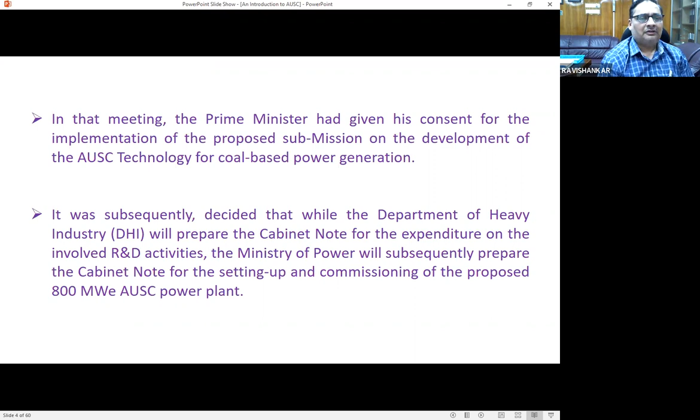So the AUSC initiatives, based on discussion at the highest level of Government of India, sir, led to the consortium of IGCAR, BHEL, and NTPC being formed by the PSA's office in August 2010 for development of advanced ultra supercritical boiler technology for power generation through indigenous effort. The key point, as we will see in subsequent slides, is that the total effort was indigenously done. Although materials were not available, the total technology development, every effort, was taken indigenously by these three groups to realize the Make in India concept, way back in 2010 itself, sir.

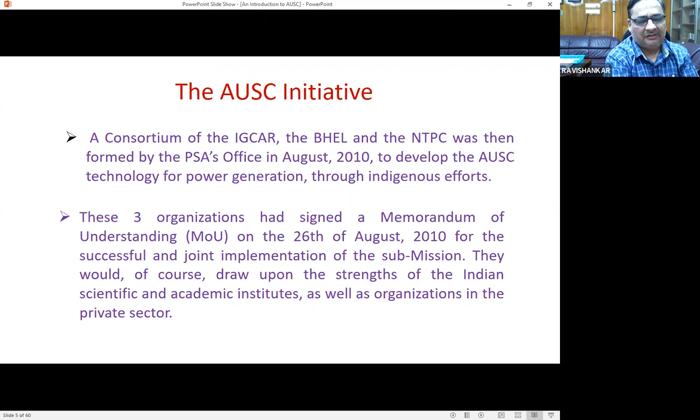Accordingly, an MOU was signed on 26th August 2010 for successful and joint implementation of the mission, sir. It was very clear at that time that the consortium would draw strength and technology availability from academia and research institutions available in India during implementation of the R&D activities. And it was done, sir. Subsequently we will see how it was done, sir.

To give a fillip, although project approval on the DHI-funded project for AUSC Phase 1 came much later, under the PSA office's direction and guidance, 10 projects were taken up to initiate the R&D work, sir. So, pending approval of the Cabinet Committee, the R&D work was started by granting 10 projects through the PSA's office, sir.

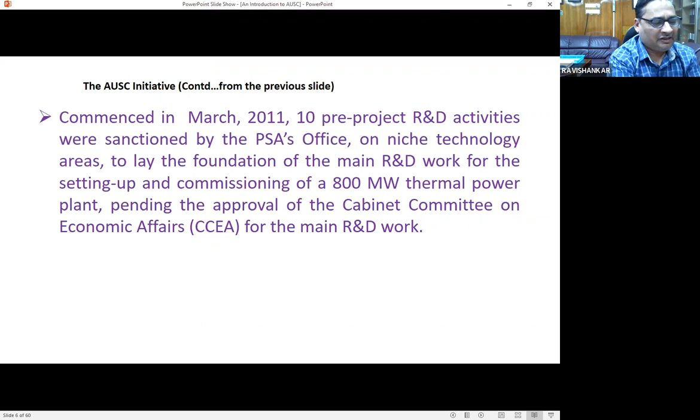The projects were mainly taken up by Bharat Heavy Electricals Corporate R&D, Welding Research Institute Tiruchirappalli (WRI), and IGCAR, sir. Those 10 projects laid the foundation for technology development of the Advanced Ultra Supercritical technology, sir. A very important project, the fabrication of a high pressure bypass valve for mainstream application, was taken up by the Trichy Valves Group. Similarly, fabrication of 9 chromium-1 moly quarter vanadium steel SA213 T91 for enclosure application was taken up by WRI. These were major projects meeting the manufacturing and design requirements for the AUSC technology, sir.

Subsequently, on 10th August 2016, the CCEA finally approved the Phase 1 project, sir, the main R&D phase of the proposed project. The duration was stipulated as 2.5 years, 30 months, costing around 1554 crores, sir.

1000 crores was granted by DHI, Department of Heavy Industry, Ministry of Government of India, and 554 crores were contributed by the 3 consortium partners. IGCAR's contribution was to be 234 crores, NTPC's contribution was 50 crores, and BHEL's contribution was 270 crores.

As mentioned by our honorable senior members of the INAE team, there's no plant as of today based on the AUSC technology, with steam parameters of 710 degrees centigrade and 310 bar pressure. The boiler design stipulated an overall efficiency of 46%, which is about 3% more than the ultra supercritical boiler technology based plants coming up in India, which are designed at 590 degrees centigrade steam temperature.

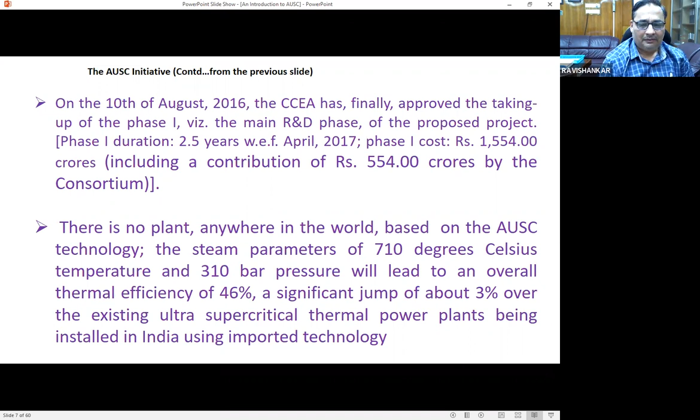As we discussed, phase 2 of the technology development demonstration plant of 800 megawatt was stipulated to take around 4.5 years to complete, based on information available at that time. So the total time duration stipulated in the note was around 7 years - 2.5 years for the R&D, which were very challenging timelines given how much development had taken place, and 4.5 years subsequently for phase 2.

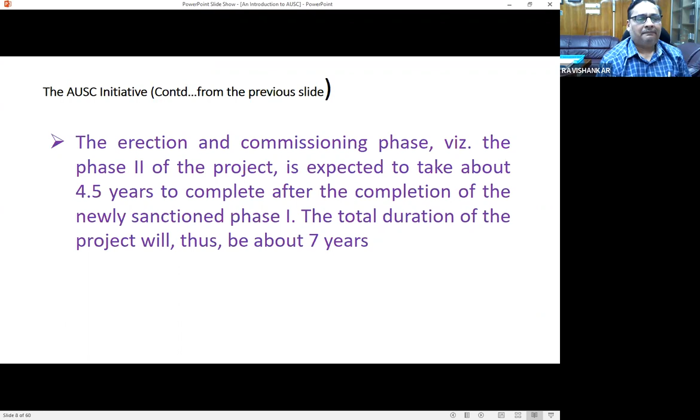Now we come to the roadmap put for the consortium partners. IGCAR was responsible for advanced design analysis, material development, manufacturing technology, testing and evaluation. BHEL was given the responsibility of development, design and manufacture of power cycle equipment, system engineering, test loops and evaluation. NTPC handled the detailed project report, project management, and operation and maintenance, based on the nature and capabilities of each consortium partner.

As I mentioned, the 10 pre-project activities sanctioned by the PSA's office were termed pre-project activities because they were taken up before the sanction of the DHI sponsored phase 1 R&D phase. Some seed money, around 60 crores, was put by PSA for taking up those projects. The most important thing was to gainfully utilize the lead time from the signing of the MOU by the 3 consortium partners to the actual sanction, which amounted to almost 6 years.

In 2010 the MOU was signed, and in August 2016 the government note on the proposal of the R&D phase was issued - 6 years in between. These pre-projects made a very good fillip, and the very important point was that the consortium was held together and worked together. These projects led to regular reviews with the formation of many committees, which held the consortium together because they were deeply involved together in formulating technical documentation, procurement, and the project for AUSC technology development.

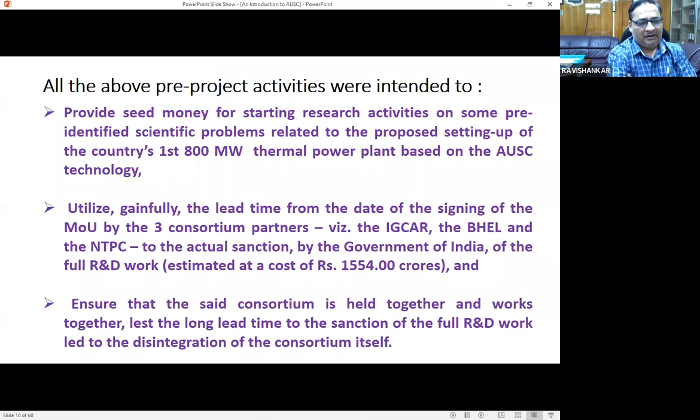A project review and monitoring committee was constituted to oversee the project monitoring and guide the scientific technical work. These forums were the most instrumental in guiding, course correcting, and advising the technical teams of all 3 consortium partners through their very detailed technical reviews, advice and suggestions to the technical fraternity of the 3 groups.

As mentioned, S. C. Chetal, former director in IGCAR and honorary scientific consultant for the ultra supercritical boiler plant, was the guiding force behind the AUSC program. It was his effort which led to the successful technical closure of the project within a very tight schedule.

Although there was some extension, it was minimal, and most of the project was completed within the stipulated cycle time - a very challenging 2.5 years for such a project, involving procurement of exotic and niche equipment, nickel-based alloy materials, formulation of manufacturing and testing plans, and establishment of 2 testing facilities, one at a boiler site and one at R&D. All this was involved, and a very challenging task was completed.

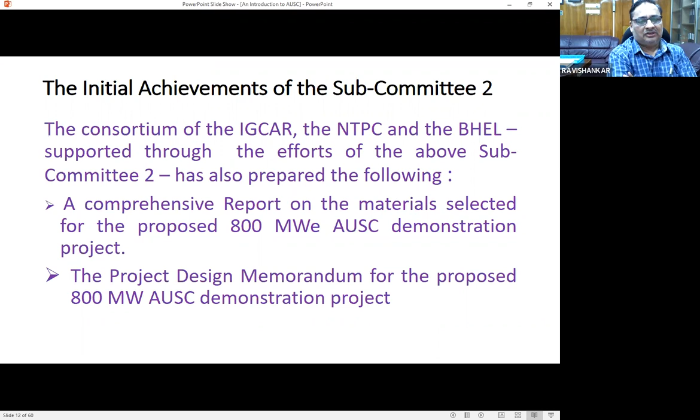The consortium also prepared very important things. A comprehensive report for material selected for the prototype, and a very important document, a 200-page document was prepared: the Project Design Memorandum for the project, which in detail outlined the design philosophy, materials to be used, and the total concept behind the power plant design, including the boiler, critical piping, and the turbine. These are 3 areas where high temperature calls for major design changes from conventional supercritical boilers, and a deep rooted approach to material selection. This was a very important document comprehensively made by the consortium partners, and it became the guiding force for the project.

Another very important document became the guiding base for identifying 136 and odd projects for the AUSC was a gap area document. As we can understand, for establishment of new technology, all the products were reviewed based on available technology, available material information, and available expertise versus what is required. Based on that, gap areas were identified, and they led to the formulation of technical projects to be taken up by the consortium members.

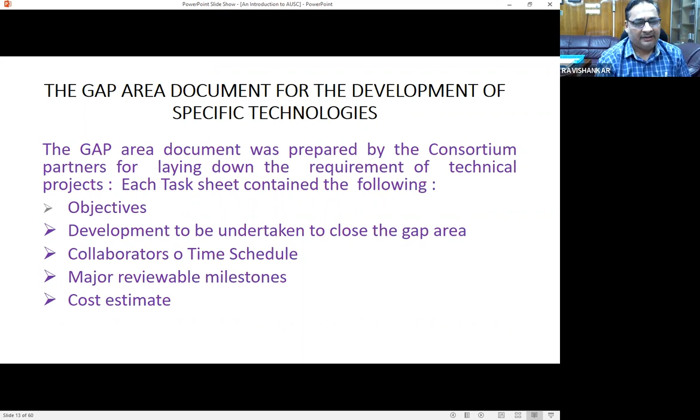I would like to submit to this forum that the total number of projects taken under the R&D Phase 1 was 136. 34 projects were taken up by IGCAR, NTPC had taken 16 projects, and the remaining around 87 projects were taken by BHEL, namely corporate R&D, our heavy equipment plant and turbine plant in Haridwar, and high pressure boiler plant at WRI. These 3 entities were mainly involved in projects on the turbine, material testing, as well as boiler components. This gives an idea that these many projects were taken up and successfully completed within the time frame, with some extension for certain projects that I will outline as we go through the presentation.

So how was the project guided? The success behind the successful completion of the project, meeting the technical requirements, was an administrative structure. We had an overarching committee and a project review monitoring committee. The project review monitoring committee was the base for critical technical reviews with timelines, bottlenecks, how to debottleneck them, and planning for the further course of action for successful completion of milestones.

As I had mentioned, a full-time Mission Directorate was constituted in May 2017, with Shri Subhash and Chetan Sahab as the Mission Directorate. As mentioned in my brief, I worked with the Mission Directorate for 3 years, under Chetan Sahab along with some of my colleagues, and I was given the responsibility of completion of projects related to the boiler and critical piping, amounting to around 18 numbers.

Other than the Mission Directorate, we had a unit level project execution committee. The unit head was responsible for ensuring milestone completions and project deliveries of each project.

We come to the broad activities of the project stipulated in the program: design of the components impacted by AUSC steam parameters, and design review of the key components by foreign experts. The total pressure part and turbine construction was impacted by the AUSC steam parameter, because there was a paradigm shift in material of construction from the so-called supercritical or ultra supercritical boiler compared to AUSC. There will be one slide in which I would like to explain the material shifting. So the total boiler design, turbine design, and the critical valves - main steam stop valve and high pressure bypass valve - became the necessary components for review by the third party.

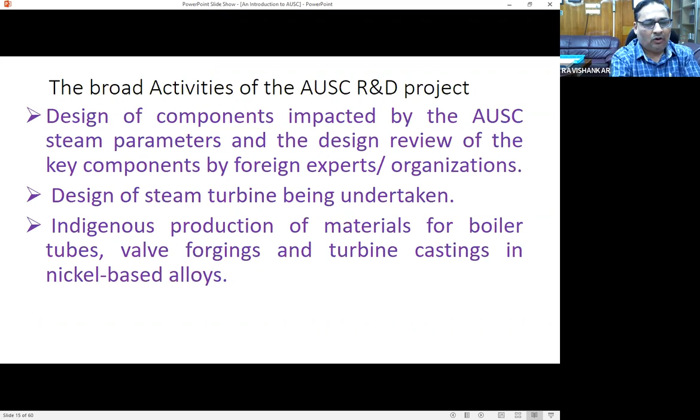And MIDHANI supplied many of the valve forgings. We got products from MIDHANI, and the forgings for the Nimonic 105 blades were also successfully manufactured at the MIDHANI plant and supplied to the Haridwar plant for machining. A very proud moment for Indian industry indeed.

Again, continue with the broad update of activities, sir.

Establishing the manufacturing technology for the boiler and turbine components. As I had mentioned in the initial discussion, sir, the entire manufacturing technology for the critical components for the boiler and turbine was established. Manufacturing process was written, along with technical delivery conditions and engineering specifications for all the materials to be procured.

New materials of nickel-based alloys and other stainless steel higher-end alloys were made in consultation with material suppliers. In some cases there were multiple suppliers, like for 617. For some materials, like Sanicro 25, which is an austenitic stainless steel, it was proprietary at that time. And of course the 740 grade is still proprietary.

So technical specifications were prepared by the units under the able guidance of the mission director, in consultation with the material producers, so that we had perfect quality material meeting the requirements of chemistry, metallurgy, and other requirements of boiler and turbine application.

The second one was the engineering facility for corrosion evaluation of boiler tubes and design of the steam turbine rotor. This facility was established in the third unit of the 4 x 210 megawatt fossil-fired units situated in Dadri of the NTPC plant, sir. Further technical details are coming up in the presentation. And turbine rotor testing, as I was mentioning, was established in the corporate R&D premises, sir.

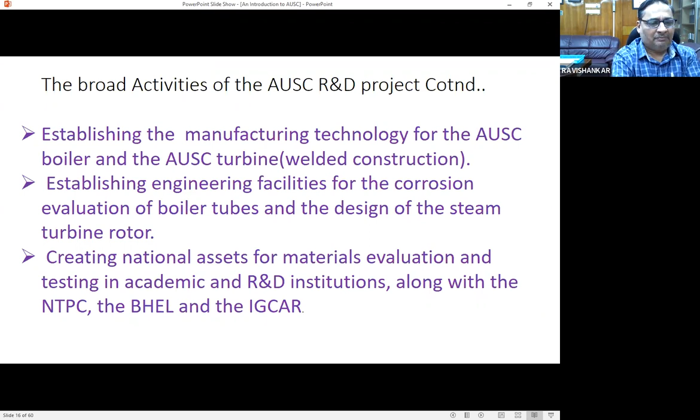Manufacturing equipment and testing equipment are available in the Welding Research Institute and Trichy plant of Thirumayam, and the boiler plant in tubular products in Trichy, and corporate R&D. So these were created for establishment of manufacturing capability in the units, and testing equipment for testing the various materials of construction which will be used in the AUSC power plants.

So AUSC technology at that time was significant from the point of view of reducing emissions and increasing the efficiency of the power plant. Ultimately, it resulted in lesser CO2 emission. So that was the main clean coal technology to address at that time, sir.

And at that time, just to update the forum, many old subcritical plants of smaller capacity are now superannuating - they are 35, 40, 45 years old. So the thinking in the minds of planners was that those plants can be replaced with AUSC technology too, given the time frame and the investment granted.

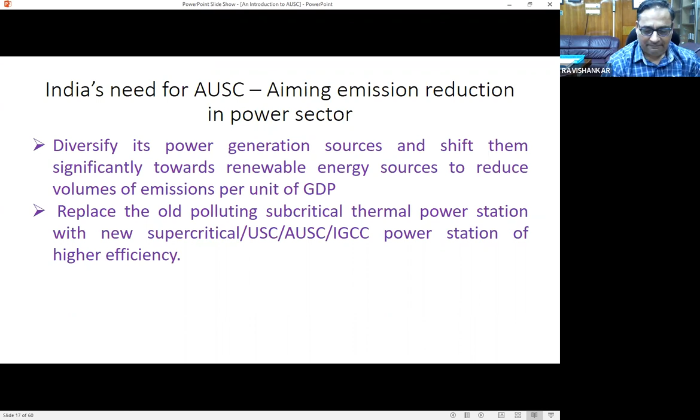So we come to that advanced ultra supercritical boiler technology. Why? We know that coal will be integral to India's energy security, sir. Whatever renewable energy may happen, at least 40% of the power may have to come from coal-based plants. So AUSC will serve as a very ideal tool for addressing these coal-based plants. That was the thinking based on which was one of the vital points for driving the AUSC technology R&D, sir.

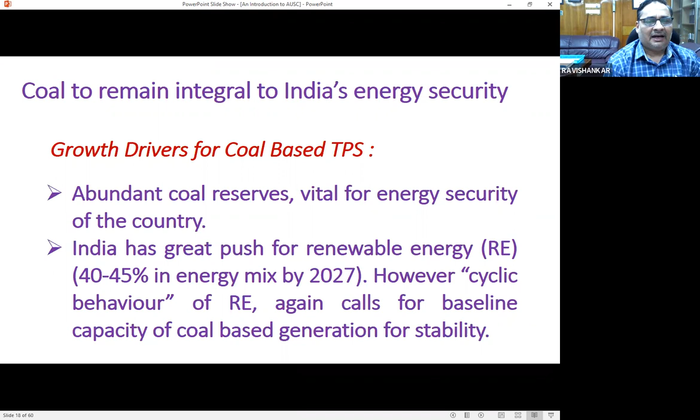Now, sir, we come to the steam turbine path. You can say supercritical, we had 565 degrees centigrade. The term ultra supercritical - these three terms I would like to elaborate here are with respect to temperature, sir, and the definitions given by various manufacturers. So we had supercritical design with 565 degrees centigrade. Ultra supercritical design when steam temperatures touch 600 to 610 degrees. And advanced ultra supercritical technology when steam temperatures are 700 degrees and above, sir. That is the classification in our steam power plants, and that definition is given as such, sir.

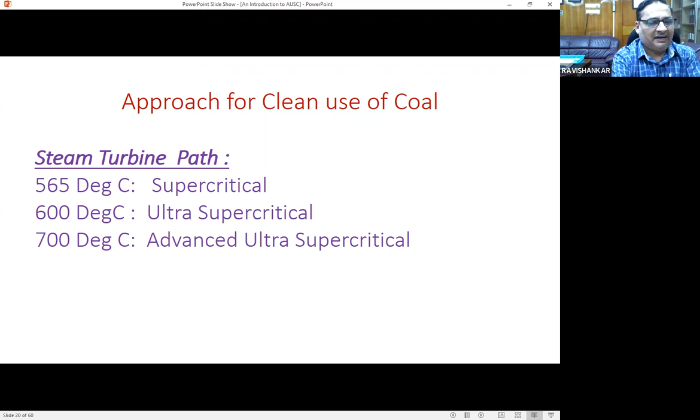So this is the thing. Already I have explained about this, sir. I will just go ahead.

Now, this particular mission directorate, as I said, was established in 2017, and the mission directorate was fully empowered for selection of manpower and financial structure. I would like to submit, because these are very important, that the total DHI funding came to the mission directorate. It was a third entity, constituted by DHI, and the total finances were distributed by the mission directorate to the consortium partners, and the mission directorate was responsible for the accounting of the funding given by DHI, sir.

And of course, senior level nominees were deputed to this mission directorate from all three consortium partners. They worked for the successful completion of the project in their own respective areas.

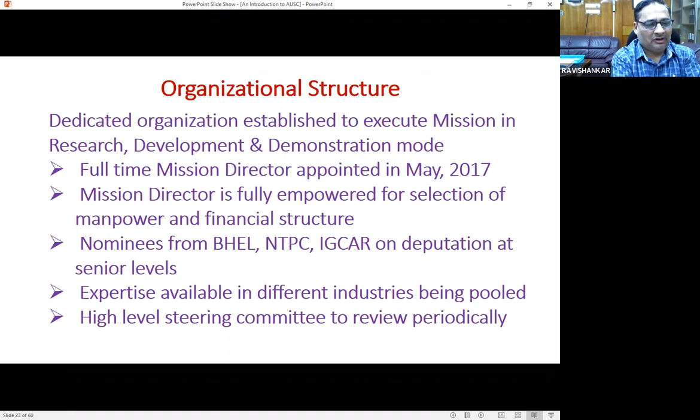Now sir, we'll come to the technology part. What are the major areas of work identified, sir? Design and design review of boilers, of course, by experts.

What we have done, sir, during the consortium meeting, it was felt that we are designing the components with new materials of construction, totally different from the earlier existing ones. Even in the total component, there is a shift of material to the higher side. Products are having different kinds of material. So it was decided it's prudent to have the design reviewed and vetted by competent parties. So that was taken up.

Both boiler and turbine designs were made and reviewed by competent parties. Their comments were taken, the designs were reviewed and modified with the comments given, and it was finalized and accepted by the consortium partners.

Come to the manufacturing technology, basically welding and machining. Mostly in boiler components, it was welding and bending of tubes and pipes, and machining mainly for the turbine components - rotor and blades, rotor and casing, sir. The turbine rotor was made of alloy 617 forging, and the casing was made of alloy 625, sir.

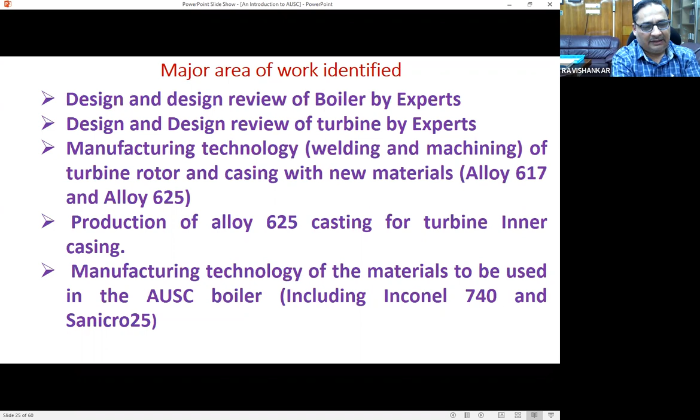Sanicro 25 is an austenitic stainless steel, sir, a proprietary steel that was used in place of Super 304H, sir. So both materials were procured and testing was done to establish the manufacturing process for the various components.

Now sir, we come to material data adequacy, which was checked. Material data for the turbine components were extensively generated through lab testing at BHEL, IGCAR and NTPC, sir. Parallelly, national institutes were also given samples, and the mission directorate, along with the help of IGCAR, developed the material data for use in the design of turbine rotor and casing components, sir.

Second point, a corrosion test facility was established for the material to be used in the AUSC, and a turbine rotor test facility, sir. I would like to submit to this forum that the turbine rotor test facility was planned for both monometallic and bimetallic rotors. Monometallic in the case of the HP turbine is going to be only a single construction.

In the intermediate pressure turbine, the rotor was optimized by using a nickel-based alloy in the high temperature zone, and conventional material in the low temperature zone. The subsequent slides will have a sketch to explain that, sir. And of course, system engineering was done - total power plant system engineering, as is done in the case of a regular project, sir.

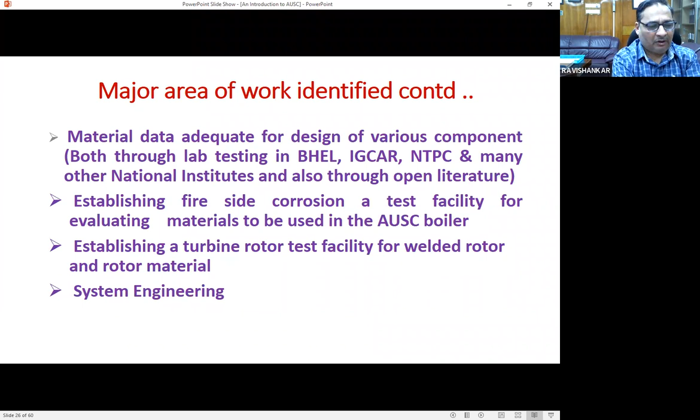So these were the basic tenets of material selection, on which materials were evaluated. Adequate mechanical strength at such high temperature was critical, and corrosion resistance, weldability and manufacturability were the key issues, because in boiler components welding is the only thing, and manufacturability in terms of successful bending for various radius of bend that one will encounter in boiler pressure parts. This was the critical criteria, sir.

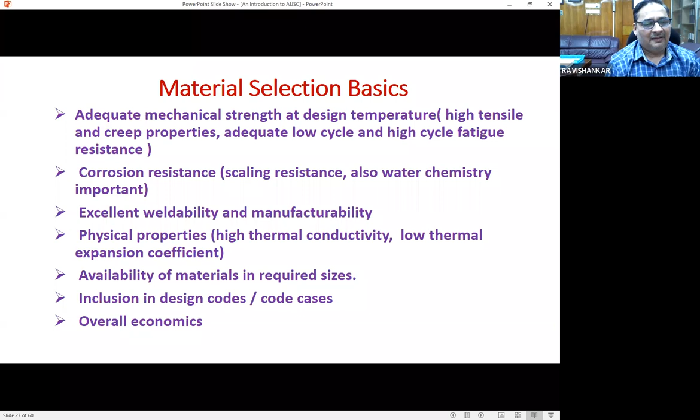I would like to submit, regarding the earlier discussion, that availability of material, although it may not sound too technical, was one of the very critical points when executing a project. Even during our R&D phase, when sourcing materials and suppliers, we had great difficulty identifying a suitable supplier supplying material of the grade meeting the technical requirements stipulated for this plant. Ultimately, for the success of any project to be pushed forward and presented in overall economics, whatever material changes and design changes we proposed had to address that final point of overall economics.

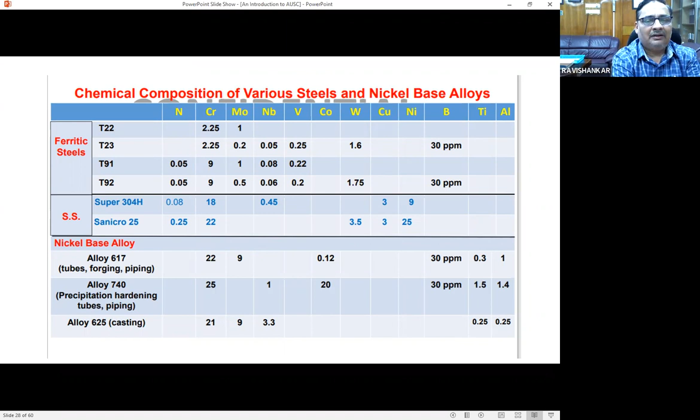Now I will come to the chemical composition. This slide highlights the paradigm shift compared to supercritical boilers, ultra supercritical boilers versus AUSC. In our supercritical and ultra supercritical boilers, basically ferritic steel of 2 and quarter chromium 1 moly T22, 2 and quarter chromium 1 moly with tungsten T23, 9 chrome 1 moly steel with 1 quarter moly T91, and T91 with addition of tungsten T92 are extensively used. Added to that, in the high temperature zone of our superheater reheater, where the medium temperature touches 590 or 600 as in the case of ultra supercritical, we go with Super 304H.

When it came to AUSC technology, T22 and T23 were totally eliminated and replaced by T91, basically more of T91. In case of stainless steel, we replaced Super 304H by Sanicro, and extensively in all high temperature pressure parts, pipe, tube, interconnecting pipes and all components, we went for 617 and 740. In the turbine, we have gone with 625 casting. So this is the paradigm shift we experienced.

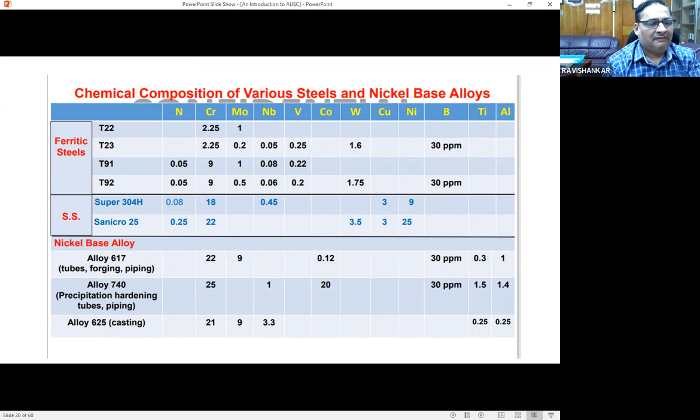And of course, this has led to high overall cost of the projects, because of the maximum use of nickel-based alloys, which are very expensive compared to ferritic or regular austenitic steel alloys. When the average stress to rupture was taken as 100 MPa at design temperature, to maintain the same thickness for better flow and performance requirements, nickel-based alloys become unavoidable. 740H was found more suitable compared to 617 because of excellent enhanced mechanical properties, which resulted in lower thicknesses, and in some cases even diameter change.

Corrosion resistance was a major shift in our enclosures, all the gas tight enclosures, what is called the furnace, or fin welded panels, which encompass the total pressure part. Our USC boilers or supercritical boilers used 2 1/4 chromium, which was totally replaced by 9 chromium steel. This one single change, one can imagine, for those who have worked with 9 chromium steel, how much manufacturing cost, time and carefulness has to be increased. That was a major shift with respect to cost in procurement and cost of manufacturing mainly.

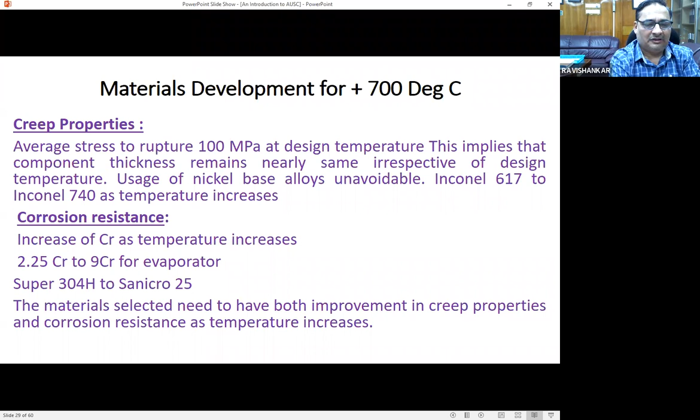And of course, Sanicro was replacing Super 304H. Austenitic stainless steel, we could not use even in conventional boilers, because of the poor physical properties.

Now we come to the economics of this plant. Nickel-based alloys are certainly more expensive. When we checked the cost of the material, we took a budgetary offer while preparing the boiler material, and costing was done for the technology demonstration plant. The nickel-based alloy cost is around 25 to 30 times more than the cost of 9 chromium 1 moly steel, T91, T92. To give an idea, the 9 chromium 1 moly steel hovers around 2 lakhs per ton, whereas the nickel-based alloy at that time hovered around 77 lakhs to 1 crore per ton, depending on the product form and sometimes quantity. But basically, we found this cost is 25 to 30 times more.

So economics became an important parameter, and that led to the change of material of construction. In general, as you can see, boiler tubes were replaced by 740, and the main steam piping was replaced by 740. The 740 could not be used for hot reheat applications because the pipe size manufacturing was not possible for the requirements. So that's why we had to be content with 617, which we retained only for that purpose.

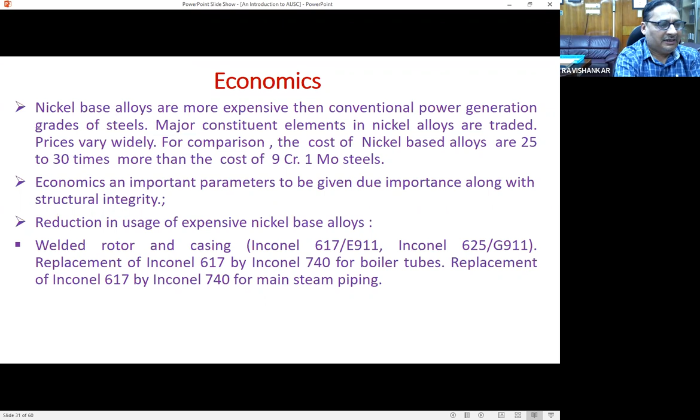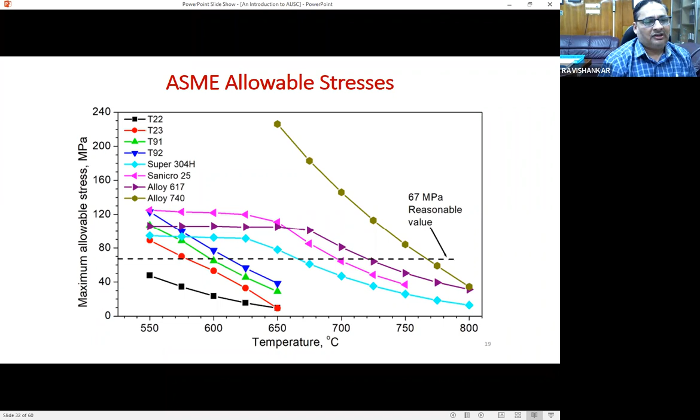So as the alloy 617 tubing, except the tubing which is not coming inside the hot heat transfer area, sir. And T91, T92, especially T91, major portion is used in enclosure. T23, T22 are eliminated in this design, sir.

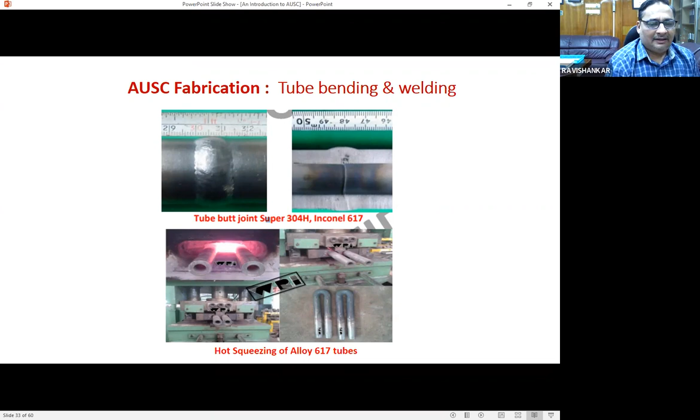These are the tubes which were supposed to be used for our pressure part fabrication. In the bottom one, you can see the squeeze bend, where the radius of bend is equal to diameter or less - that is the innermost bend of our heat transfer areas. This is most critical because you have to maintain the radius without any ovality and thinning going beyond the requirement stipulated by the boiler code, sir.

Similarly, the diameter, the size of the tube, 52 by 11.9, is the stipulated size of the tube in the high temperature pressure part application, sir. You can see the bottom one, the swaging we do, because swaging is required when the diameter changes in the boiler pressure part heat transfer area, sir.

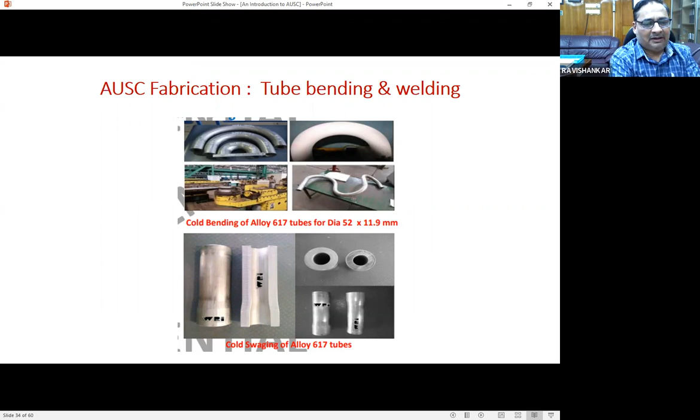Swaging is an alternate method to welding a reducing insert, sir. A reducing insert may cost more due to manufacturing cost as well as welding cost. But this swaging is accomplished in a single stage. This was also based on the requirement of the boiler design. These are also established in our shop, sir.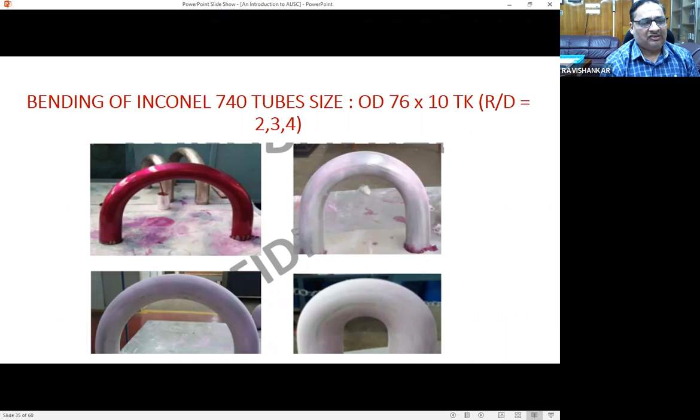Now, the same thing we did with the 617 tubes, you can see was also done with the 740H tubes. R/D ratios of 2:3:4 - you can see pictorially they were established successfully in our shops. These are the configurations I would like to narrate, taken really one-to-one from the boiler design which was made for the AUSC TDP, sir.

Here you can see that with Sanicro, similar welds and dissimilar welds are also done. Welding processes are developed pictorially. We are depicting that in this photo, sir.

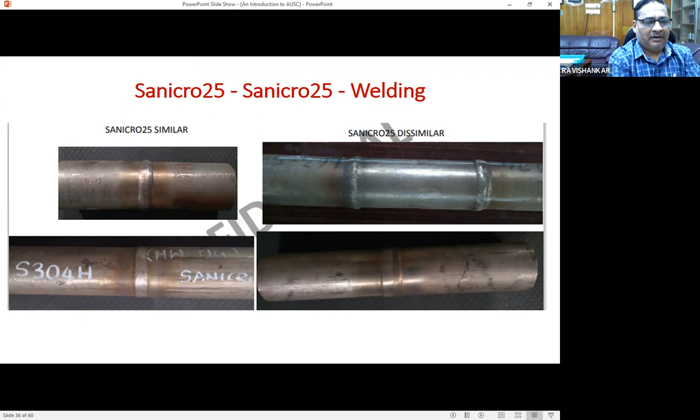Now we come to the very critical point of this - we call it a header, sir, or a manifold, where one system tubing gets connected before going to the other system. So this is a header which was taken. You can see the size of the header, 457 by 120 mm thick, 617 pipe, which is the selected size for the main steam outlet header in an AUSC power plant boiler.

And this was procured. The typical tube to pipe welding process was established. They were welded, tested for all the IBR related requirements, ASME related requirements, and also tested hydraulically for the weld integrity, sir. So the prototype of the product, albeit in shorter length - the header length was around 2 meters - was manufactured in our Welding Research Institute.

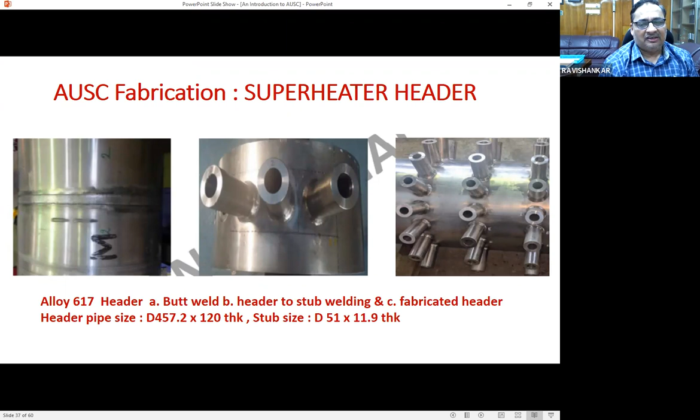These are the actual bending of the pipe, sir. In boiler, like in other nuclear power plants, we have interconnecting piping. Piping is always of higher size. You can see that in our Thirumayam plant, we have a pipe bending machine.

Here they were successfully induction bended. The pipe size, in case of the main steam line, was ID 315 by 95 mm thick, sir, for Inconel 617 material. When we substituted it with 740H material, the size became ID 315, inside diameter 315 by 47 mm thick. The thickness was reduced by almost 60%, 70 to 80% in that case, sir.

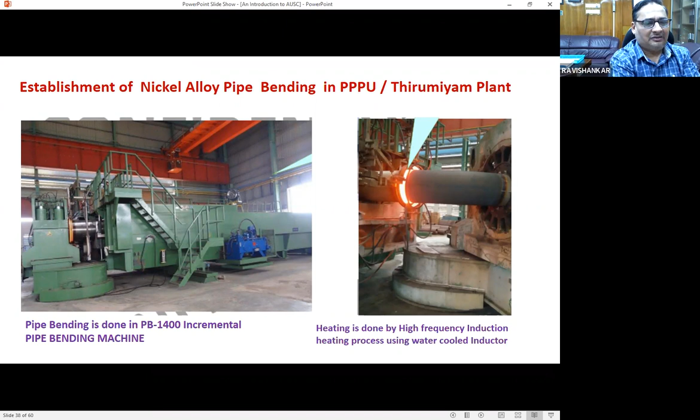So this is just a picture taken during the bending, sir. This text just depicts what I said.

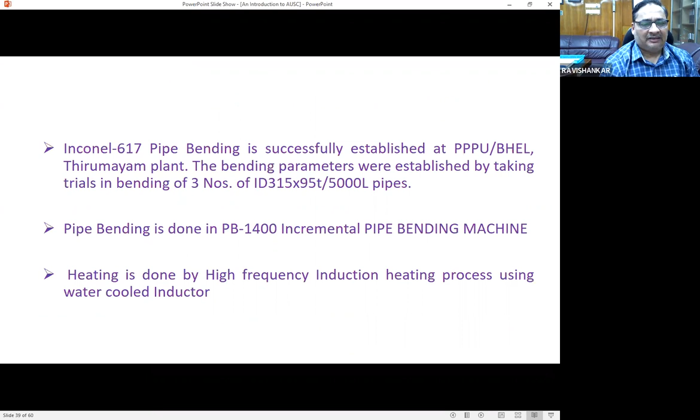Now, sir, in case of the main steam line, the high pressure bypass valve was designed indigenously with help mainly from Mission Director, sir, and the designs were vetted through a third party. This was successfully manufactured, and I would like to submit to this August forum that this valve has been accepted by NTPC to be put in as a test example in their North Karanpura 660 megawatt plant for testing purposes, sir.

This valve is going to be on live real-time testing and examination of the valve design and the material integrity, sir.

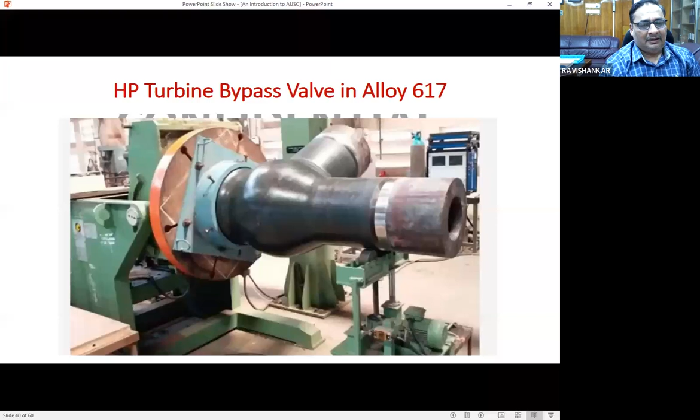Similarly, the superheater safety valve was also manufactured in-house in our boiler valve shop for the parameter of 355 design. In this case, indigenous supply of alloy 617 forgings were there from MIDHANI, which were used for the construction of the safety valve.

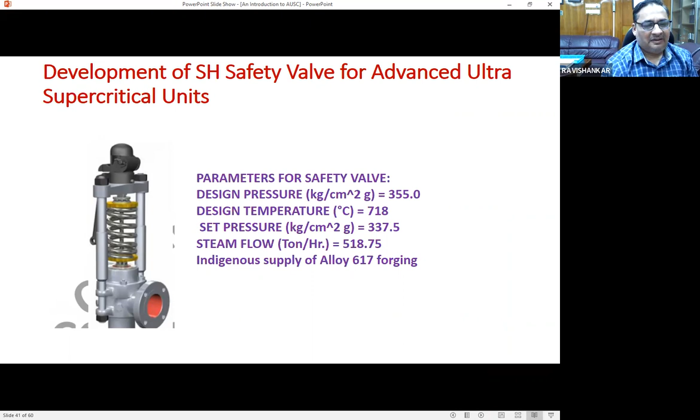Now we'll come to the turbine rotor. The intermediate pressure basic construction for a supercritical unit uses X12CrMo material and X19 material for the blades. First, the total rotor was conceived with alloy 617 forgings, but it proved to be a very costly affair.

Then rethinking was done, and we went to a very novel concept of a welded or bimetallic rotor, wherein the high temperature zone alone, when the temperature was beyond the limit of X12 material, alloy 617 was used, and at both ends we had gone with the regular material of construction. This was termed a welded rotor, which so far, in none of the supercritical boilers till our time, has been used. So the ultra supercritical boiler will be the first time in this project that we'll have a welded rotor in place.

The rotor, as I mentioned earlier, has 900 millimeter average diameter, and the total rotor is around 12 meters in length. The material was procured, the rotor was machined, the blades were inserted, and the total rotor was constructed in our Haridwar shop.

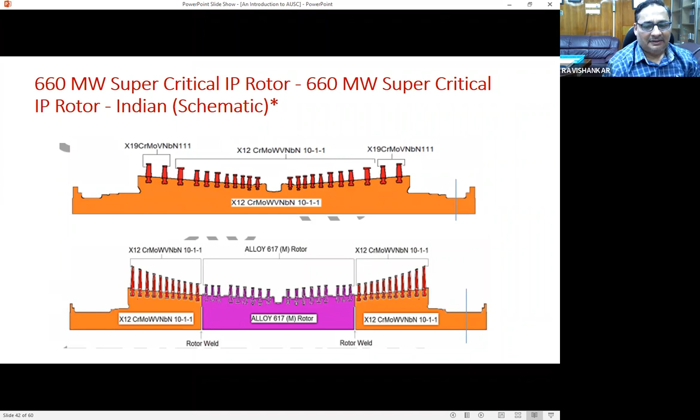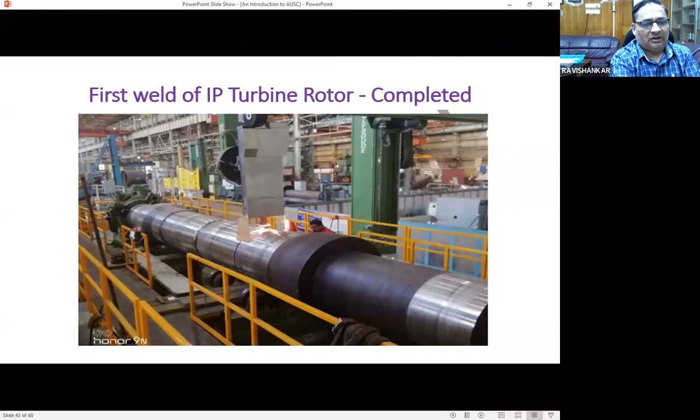You can see the welding of the rotor here. The machine came from Schmidt, and these rotors were from Schmidt, and the welding machine equipment was also from France. So the 1:1 size rotor was welded in our Haridwar shops.

Similarly with casing, based on the temperature profile, the intermediate pressure inner casing was constructed of the regular material, and the brown material shows the Inconel part. It was constructed in two parts, upper and lower.

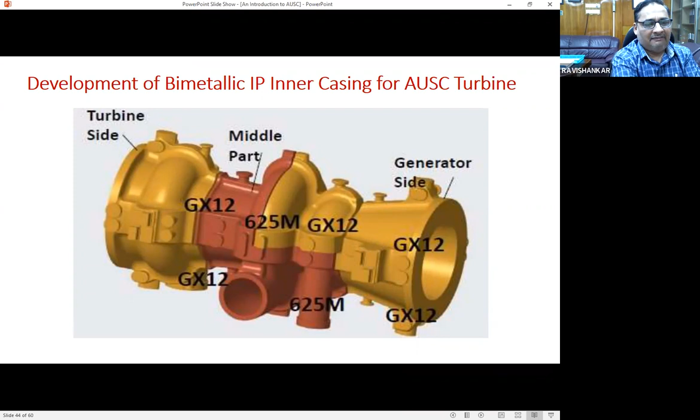I'm very proud to say you can see the lower part, alloy 625 casting being taken out. This photograph was taken during one of the project review committee meetings, when all the dignitaries were present. In front of them, the casing was taken from the furnace and water quenched. This casing weighs around 20 tons. It is the highest weighing casting of its kind in the world, made successfully by our BHEL Haridwar plant, Central Foundry Forge Plant.

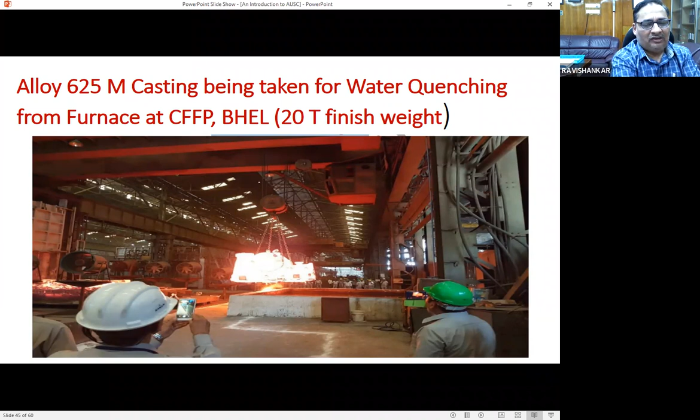Coming to the blades, as I was telling, the alloy 617M blades were successfully machined in the state-of-the-art manufacturing facility available in the blade shop at our Haridwar plant.

Subsequently, when there was a design change given based on the comments of the reviewer, the blades were changed to Nimonic 105. I'm very proud to announce to this August forum that Nimonic 105 forgings were made in MIDHANI, supplied to BHEL Haridwar plant, and the machining of those blades was successfully done. So that's a very classic example where, although MIDHANI was not able to give very big size rotors, I'm sure that many components of the AUSC were developed indigenously by MIDHANI with great efforts, and that Made in India, Atmanirbhar concept seed was sown at that time.

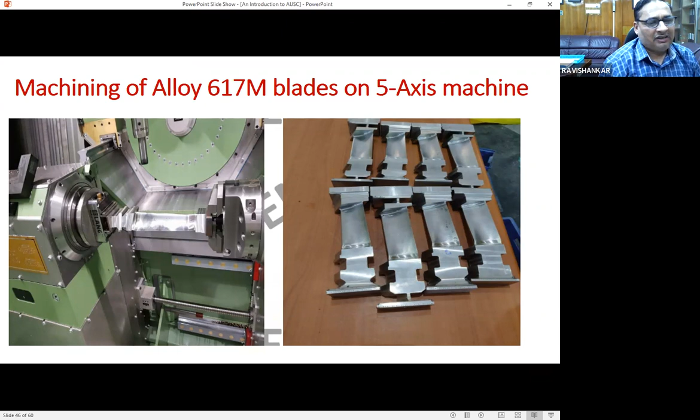Now I am going to talk about a few details of our corrosion test rig. It is put in the Dadri 210 megawatt fossil fired plant of NTPC, situated in Dadri, Ghaziabad.

In the schematic, as I was explaining earlier, we are tapping the steam at 540 degrees centigrade and 136 kg pressure from the main steam line. A loop, with 4 number of loops, is connected to one inlet and outlet header. The circles you see in the pictorial representation are the headers.

There are 4 number of coils hanging in the furnace. There are flow measurement and temperature measurement equipment, 4 of each, and control valves installed. The outlet steam temperature is 720 degrees centigrade.

At 720 degrees centigrade there is a pressure reducing valve. The pressure is reduced to 45 kg, and we have a mixing piece in which the hot steam at 720 degrees is cooled to 550 degrees centigrade by taking a tapping from the low temperature superheater outlet steam, which is at 390 degrees centigrade.

So that lower temperature steam, at 540 degrees plus or minus 15 degrees and pressure 45, is joined to the hot reheat pipe and recirculated in the boiler. The flow taken was around 20 tons. There are 4 number of assemblies, and each assembly has got 2 elements, and the flue gas temperature at this zone is around 1200 degrees centigrade.

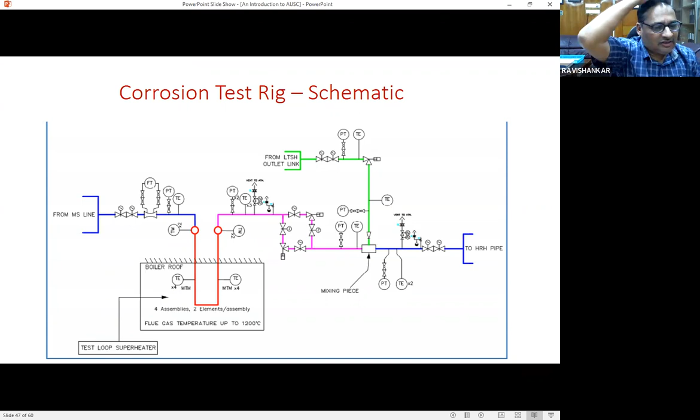Now we'll come to the construction, sir. You can see the physical arrangement. The total overall length of the heat transfer element is 13 meters inside the flue gas path. The horizontal line shows the furnace top. The coil is hanging inside the furnace hot temperature zone. The inlet and outlet manifolds are outside the flue gas path. You can see above the center line of the furnace.

And the material, sir, we have put all the materials that were to be used in the AUSC boiler construction, namely 617, Super 304H, and T91. Number of assemblies: 4, and number of elements: 2.

I would like to update, sir, when the 740 tube was introduced to replace the material of construction for the tubes and pipes, in this test loop also we supplied a new coil which had the 740 material and Sanicro material included. One number of coil was manufactured and erected at Dadri site, so that we get experience on the latest material with respect to hot temperature corrosion and other material properties when exposed to the hot flue gas.

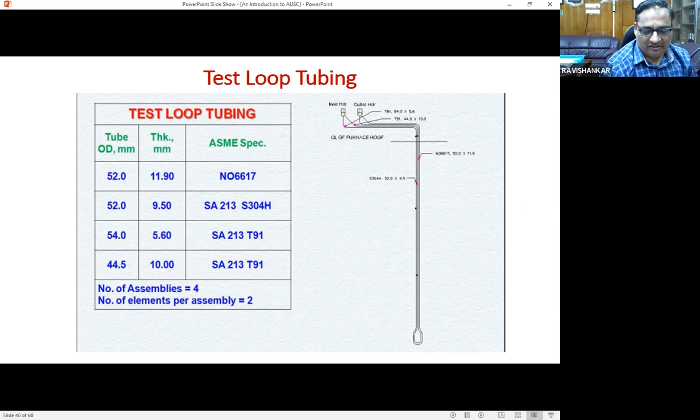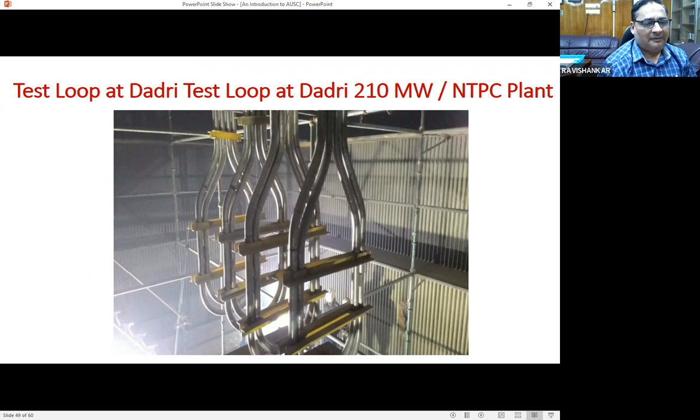This you can see, sir - this is the photograph taken inside. You can see the enclosures and the 4 number of coils after erection inside the furnace. It is hanging from the top.

This is the control room dashboard, sir. Because this test loop is a standalone total equipment, it has all control mechanisms and a feedback control system like any equipment in any plant. You can see the total control dashboard - various parameters are monitored, and there is a provision to capture data online and provide it to the consortium partners for their review. That provision was made. The test loop, actually, because of COVID and other low power requirements, had not been operated earlier.

But now it is operating based on demand requirements. To submit to this August forum, this test loop was successfully commissioned on February 2nd, 2019, and it was dedicated by the respected BHEL chairman, and of course our directors and NTPC directors, on the 9th of February 2019.

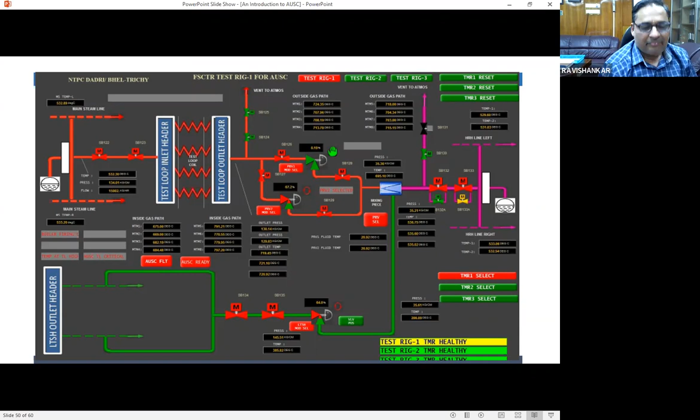So now, these are the developments I have shown in this time period, sir. To give a final update, projects were taken on the boiler components and turbine components. Design was made for the total boiler components, total turbine design - rotor and casing design was made. It was reviewed twice by the competent authority: first time taking corrective action, and the second for the final review. It was validated by the competent person. The total manufacturing technology documents were prepared, and it was successfully manufactured.

And I'm very proud to submit to this August gathering: the project completion was one mandate. A very elaborate, detailed documentation of each activity of the project was another mandate. All the project detailed technical documents were prepared. They were reviewed by the mission directorate personnel, finally reviewed, commented upon, advised by the mission director. After doing the final correction, they were submitted, and they are with the consortium partners. Very detailed documentation was made for all the projects, sir.

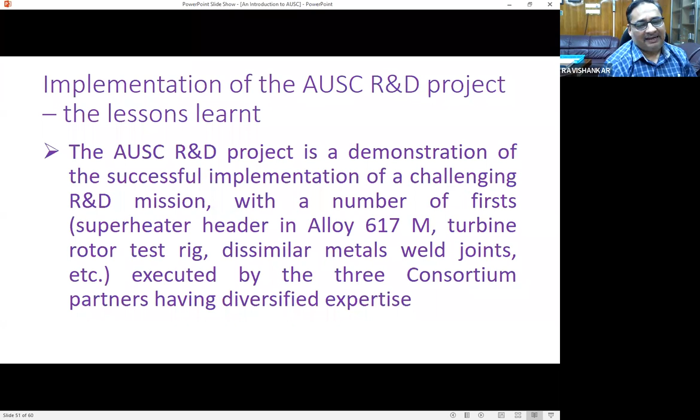And now we'll come to the implementation, the lessons learned, sir. Very proudly I can declare, sir, the AUSC R&D project is a demonstration of successful implementation of a challenging R&D mission with a number of firsts, like the superheater header and Alloy 617 M, turbine rotor test rig, dissimilar metal weld joints, executed by 3 consortium partners having diversified expertise. This is already becoming, in the BHEL family, an example of success for other national challenging ventures, sir.

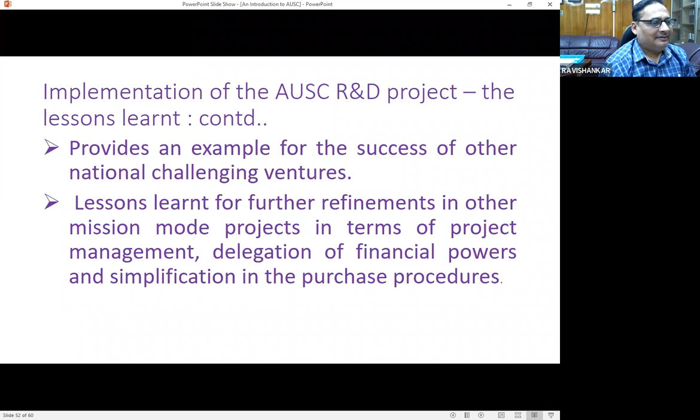This was deliberated in the highest level overarching committee forums, that whatever learnings were there, they can be the path-breaking points for refinement in other mission mode projects, sir. And as it could happen, the most important takeaway was the simplification in the purchase procedures - because all the consortium partners were to use their own respective procedures, and being a government entity, this became a sort of handicap in faster procurement of material and execution of the project.

To sum it up, sir, AUSC provides better utilization of coal reserves and reduction in emissions, with efficiency of 46% made sure, sir. Very, very challenging. We are extremely thankful to the Government of India, Ministry of Heavy Industry, DHI, who were so kind in giving the funds to all the consortium partners, and with their support it was possible, sir. It was done in real mission mode, sir.

I would like to point out to this August gathering that the total time extension we took was only 1 year, sir. May 2017 to September 2019 was the stipulated time period. In 2.5 years, we could buy so much exotic machinery, one of its kind material, do the fabrication, testing, get the designs done, review by the competent authority, and finalize the documents. The reviews by the high-level committees were very effective and supportive of executing the project in time, sir.

Now this gave confidence that the consortium is ready with the design and manufacturing of the critical products of this AUSC technology, and we look forward to the coming up of the first technology demonstration plant, in which we can showcase all the hard learned, earned, and established technology, sir.

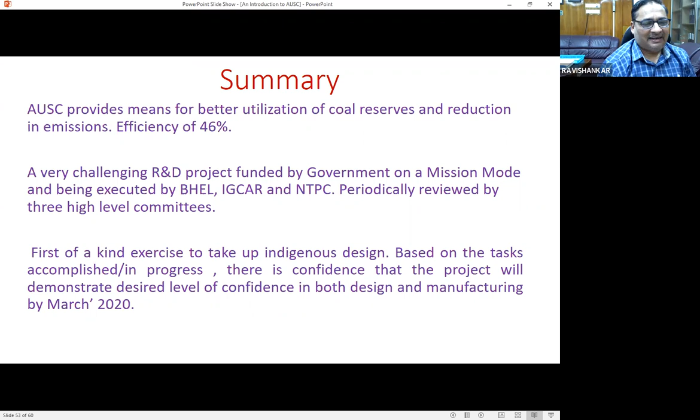With this, I would like to complete this brief presentation on the AUSC technology roadmap. Once again, I'm extremely grateful to the organizers for giving me this opportunity to briefly talk about what was done under the AUSC R&D phase, sir. Thank you so much, sir.